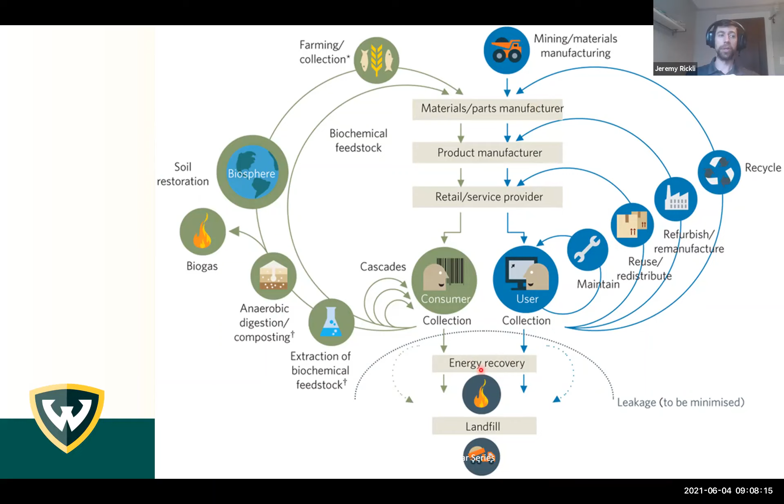And the circular economy really aims to advance those feedback loops. So how can we really avoid things going into energy recovery and landfill? And for me particularly, it's looking at discrete components - so not chemicals, not as much materials, but products that have multiple components that are assembled together, multiple materials, multiple functions, multiple lifetimes.

And how do you really go from this materials and manufacturing, and how do you plan in the design and in the use and in your operations to make these feedback cycles really operate efficiently? And there's different levels and there's different options that you can choose between remanufacturing, recycling, and reuse, and maintenance.

So maintenance will be sort of extending the lifetime of whatever item or assembly you have. Reuse, redistribute doesn't really put any more value, doesn't add any more value into a component or product. It basically brings it back into the cycle for another lifetime.

So, I think one example is plastic shopping bags. Sometimes you have people that collect a lot of them, then they reuse them to make bags - like larger bags to carry groceries in. So that's sort of a reuse side.

Refurbish, remanufacture really aims to add or to recoup some of the functional value of the product, to make it act like it is a new product, to give that same sort of quality, same sort of performance. So you are putting in some value, adding some reprocessing to the part in order to make it almost act like new. In the remanufacture, reuse kind of phase, in some areas and in some communities, it's called retaining the functional value.

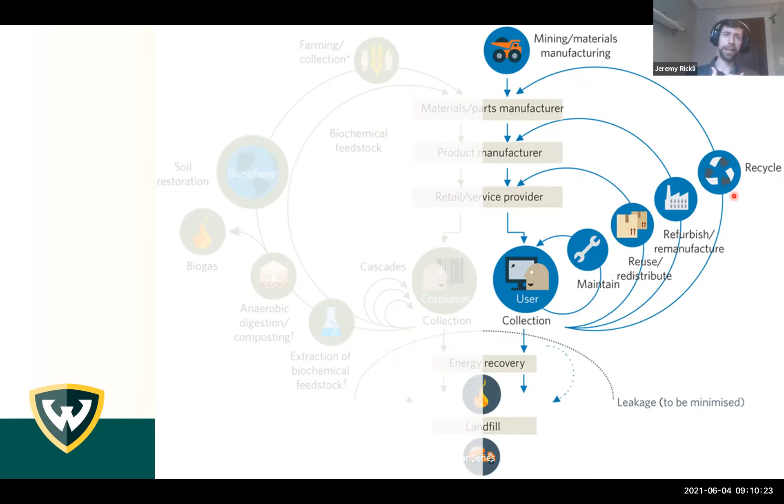Now recycling is usually classified as retaining or recouping that material value. You're kind of melting down, shredding the material, so eliminating the original function that component was for to get at that basic material.

Now, one thing that I kind of want to zoom in on here is these steps. So user, maintenance back to the user, reuse back to the retail/service provider, and refurbish, remanufacture back to the product manufacturer. Recycling goes back up to the materials manufacturer.

And where we focus on, and where this talk is going to focus on, is really the steps to make that happen - the steps that happen at these facilities. What does it take once you have it collected by a user, once a remanufacturer or core collection agency or recycler has it? What do they really do with it to access that value that exists in those parts?

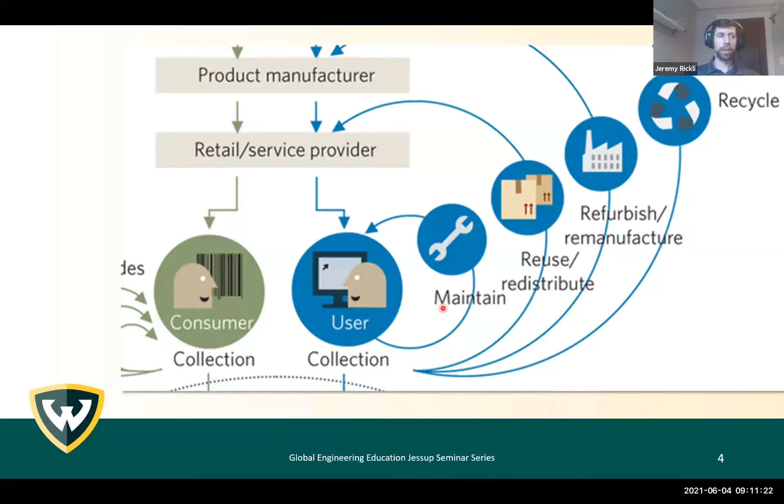How do they more efficiently get to that material value, get to that functional value in the specific components? This talk's going to focus on how we make these processes better that's happening in these entities.

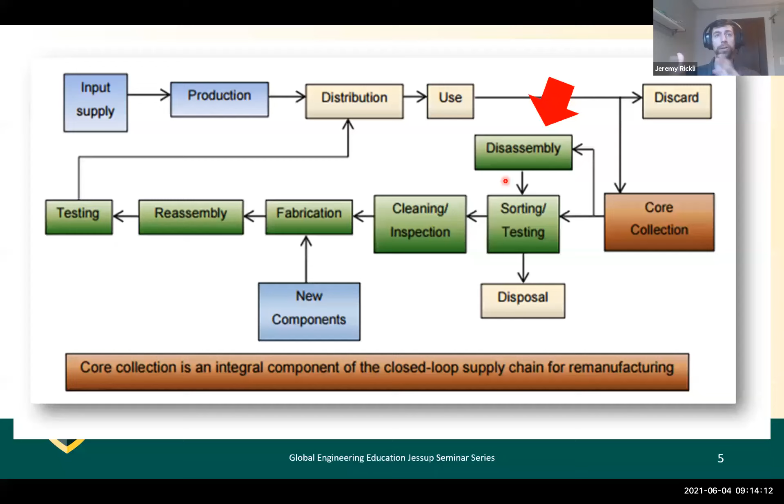So what is disassembly? Wei Song had mentioned kind of what disassembly is and how it fits into the system. I want to bring one definition that I'll keep consistent with the rest of this talk, and it varies a little depending on what literature you're reading. But here we're going to classify it as the process of physically separating a product into its parts or assemblies. That's what I'm going to focus on with disassembly.

Our research really tries to get at how we can make those methods better. How can we plan those methods better? How can we automate it? How can we design that into the system? But why do we want to do it?

So yes, it fits with the circular economy. Why is that good? Well, the first reason is reducing environmental impacts, reducing the burden on the environment. Keeping those materials in the loop, not sending them to landfill, trying to eliminate the environmental impacts that would happen if you just dispose of those components, potentially toxic materials, heavy metals, avoiding those going back into the landfill.

Now the second reason is cost. This is for some materials where you have trade-offs depending on what you're looking at. The cost of manufacturing some materials is very expensive, while the cost of remanufacturing those materials or components is significantly less. So if you can get to these components that you can remanufacture, the investment needed to remanufacture these parts is less than creating a new one.

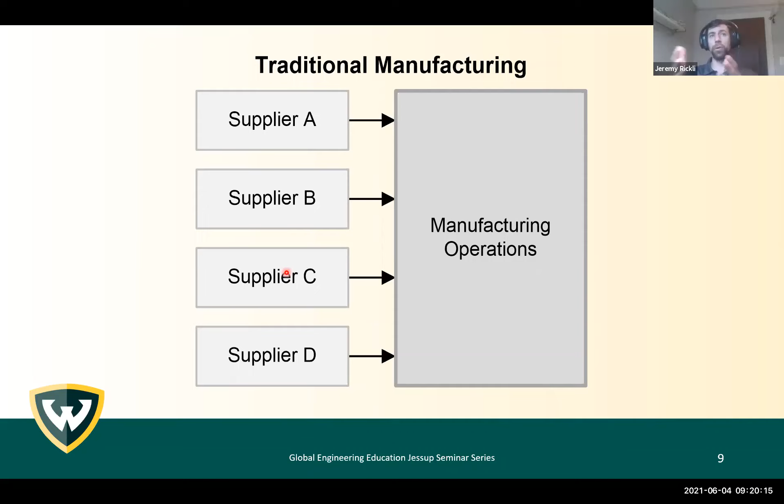So we don't have to require that companies deal with their products at end of life - they will want to anyway because there's an actual business case, along with an environmental case. If we go to traditional manufacturing, why we don't have that uncertainty is because manufacturers are able to release specs and have contracts with their suppliers that X amount of parts have to be delivered in Y quality standards. So you have these negotiations and contracts between your manufacturer and suppliers, and their performance is based on delivering materials at a certain quality, which can be controlled - so you're able to really know what's coming into your factory.

You could have a car that's at 100,000 miles, or you could have a car that's at 250,000 miles. And so they're trying to deal with all this to make some sort of business enterprise where they can reduce this unknown or uncertainty through disassembly, cleaning, inspection, and then have the processes to add value back to that part and send it back out.

So the goal we want to do in the lab is really research methods that take what we see now with value recovery and push it more into traditional manufacturing. Not push it towards traditional manufacturing, but really lessen these unknowns, make it more consistent so remanufacturers know what they're getting, or have a better way to deal with the uncertainty, so their operations downstream flow better or more efficiently.

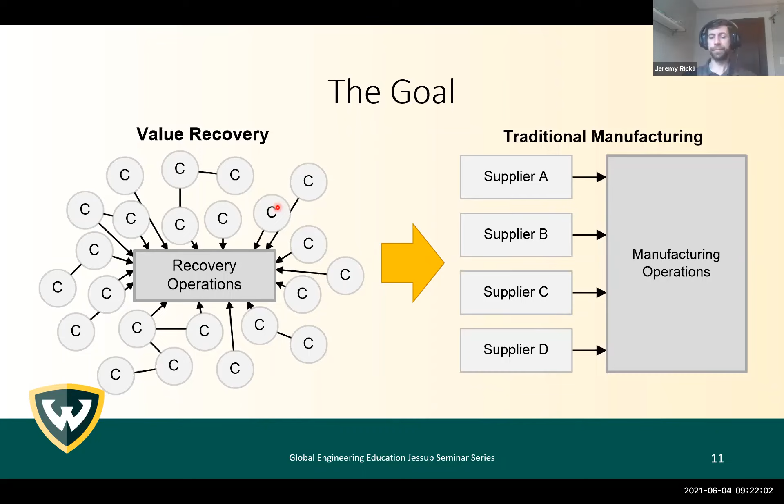How do we do that? This is where I'm going to focus for the next hour or so: three different ways. This talk is divided about disassembly, but into three different ways that we target it in the lab. One is planning, which is a mix between the stages of use, recovery, design - what do we do about planning for disassembly, whether at the design phase or whether I already have the design and have to remanufacture and disassemble a lot of these parts.

How do I plan for it then? Next is automation. So where does automation fit into disassembly? What are the challenges with it? Are there opportunities to really advance disassembly through some sort of automation?

And then lastly, we're going to get to design. As I go through, I'm going to try and tie all these together to show how planning can really impact your automation. Automation can affect how you want to design the part, and design could really help you out with planning and automation. So there's sort of all these different connections, and they feed back with one another. It's not just that design will feed down to automation, that'll feed down to planning - there really is a feedback here.

Now, we're looking at these, I would say right now, kind of separately. We have some planning work, some automation work, some design work. But one thing that really interests me is integrating these. So how do you get that feedback from automation? How do you incorporate that back into design, and how does design then come back to feed the automation side?

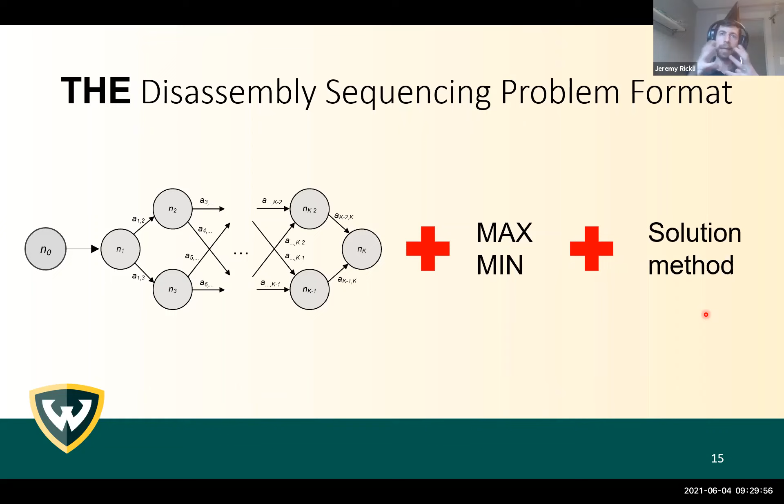So you have your representation, you have your objective function, then there's some sort of solution method for disassembly—an optimization algorithm, some sort of simulation, whatever it might be. This is how disassembly sequencing problems are set up, for anyone considering or doing research in this area. It really hinges on the incoming data for the disassembly. The objective functions and solution approach—especially the solution approach—can be pretty general; you can pull from different areas. The objective function you can change. But really, an essential piece of this is the data of how you represent disassembly.

I'm showing one version here, and I haven't seen any studies on what's the best version. I think it's personal preference, and sometimes it just depends on what part you're doing. But this is what we would term a directed disassembly network.

So here at node 1, this node would represent a fully disassembled or a fully assembled product, like your engine or a coffee maker, complete how you would use it. Each of the nodes represents some stage of disassembly—this would be stage 1, stage 2, maybe stage 3 or stage K as you get toward the very end.

Those stages are characterized by an assembly, the parts that are still remaining together, and then some part that you've taken off, represented by A. So A here would be an arc. I would take off this component of the product first, and that would take me from disassembly stage 1 to disassembly stage 2. This is a model that can get very complex and very large depending on the product you're doing.

But we're able to translate this directed disassembly network into basically a matrix representation—could be ones and zeros, could be something else. This information is really what we can input into our solution methods, and it allows us to determine whether we can disassemble it in that way.

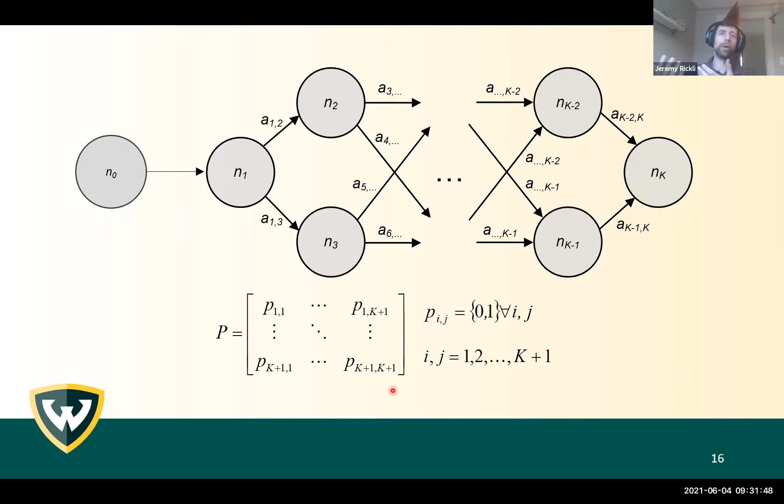If we can get that information, we can determine what the cost might be of disassembling in a certain way. It also gives us a way to check different disassembly sequences—is it feasible, can we actually achieve our disassembly goals with that sequence, and does that lead to a better objective function? So that's really one of the main values.

Now, the objective functions can vary. You have ones that minimize environmental impact, or some that really focus on cost. This can be a wide array of different variables or parameters within cost or profit—it could be maximize your profit.

In this case, we have like four different functions here, but really what I want to do is understand how my profit or revenue varies depending on my sequence. Can I determine a disassembly sequence that makes my profit or revenue more reliable per product or overall, so that I know I'm going to get maybe $5 or $2 on most every part I remanufacture? Or am I going to change my disassembly so that I might lose some money on some parts, but have the chance for overall larger revenue after I consider all the parts I disassemble?

And then the solution methodology—the one we've implemented is a genetic algorithm. There's a variety of versions of genetic algorithms, but in this case, the genetic algorithm will basically search through different sequences.

As it searches through those sequences, it will evaluate what the profit is, what the environmental impact is, what the variability in the profit is—whatever your objective function is. Then from those solutions, the way the genetic algorithm works is it generates new solutions, trying to slowly improve those existing solutions or sequences that you have.

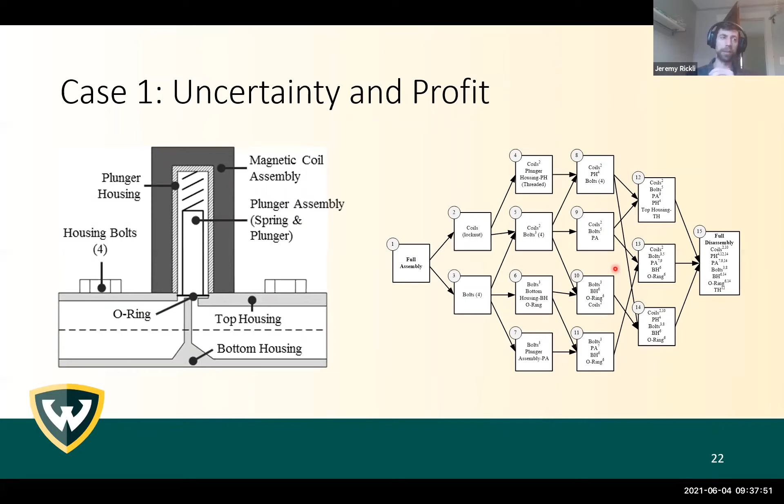First step, again, was converting it into our disassembly data, our basic network here. And then we said, what can we really do with that? How can I really investigate these impacts of what happens during the use phase in my optimization, in my decision making for my sequence planning?

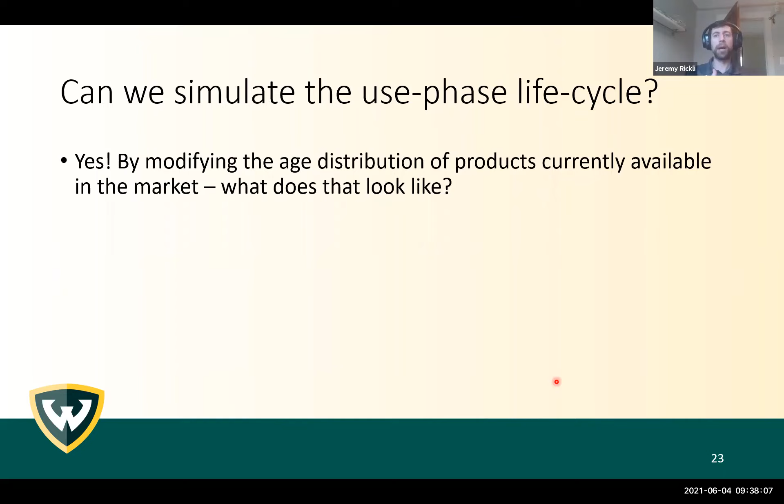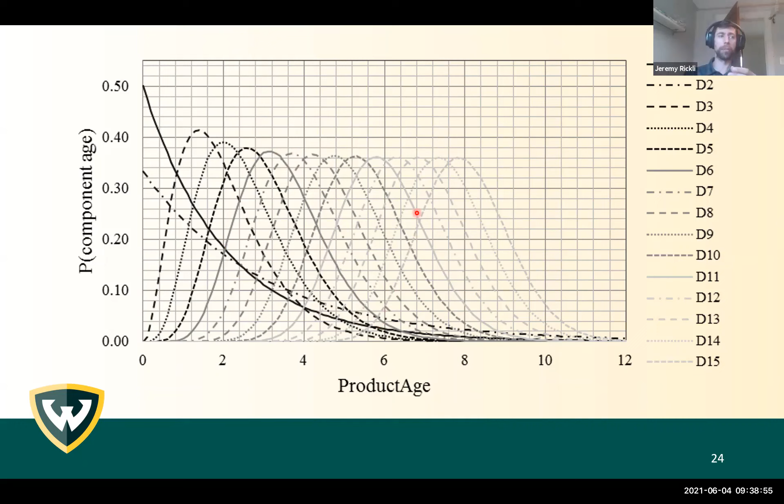Our company stopped producing it, so we're not releasing any new products out. Now most of the products that exist in use are around 3 years old, following some type of distribution. We can continually increase or change that distribution so we can get out to the point where this is now maybe a legacy part. We're not manufacturing it, we don't have the plans. Most of the products are fairly old, they're going to be fairly worn.

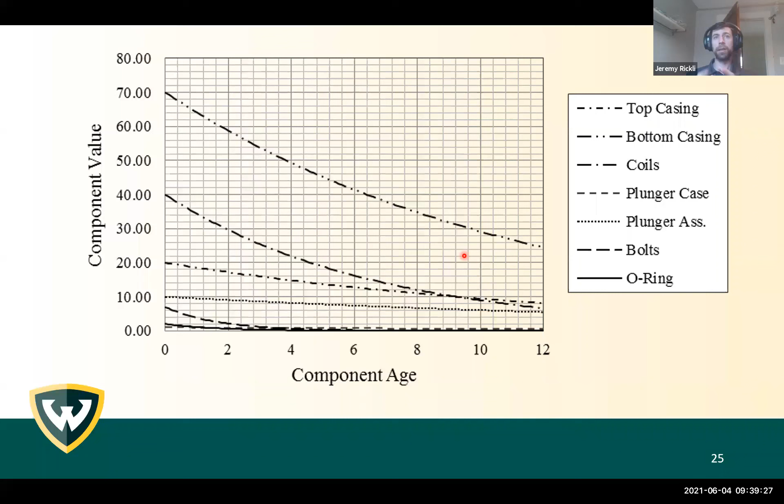Now, as that population ages, each component within that product is also going to change in value, and here we have these value curves as the component ages. You'll see this product here, the bottom casing that we call it for the solenoid valve, starts out as a very high value product, the metal piece that maybe has a lot of resale, recycling, remanufacturing value. Then it's decreasing around in years 8, 10, it's decreased by about half. So we take those two data points, and as we increase this distribution in our model, in our sequence optimization, our disassembly is going to change.

Our sequence is going to change, and our potential profit or our costs are also going to change. Because as the products are out here around age 8, we can see that the value profile of those products really changes for the manufacturers. Now, what can we get to it?

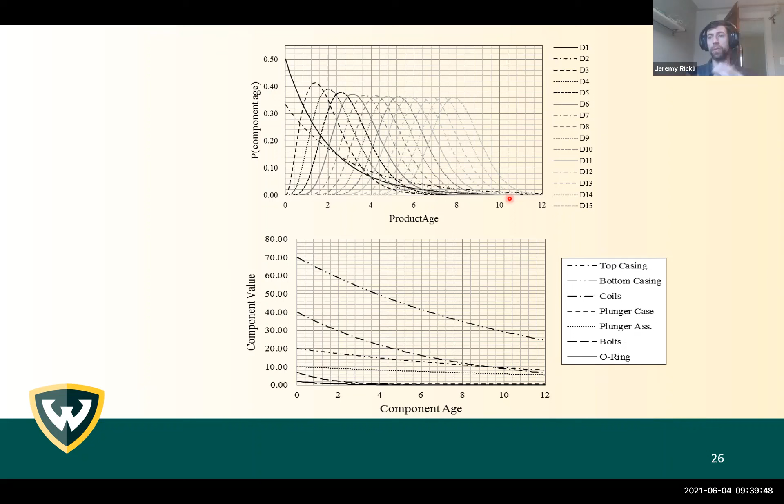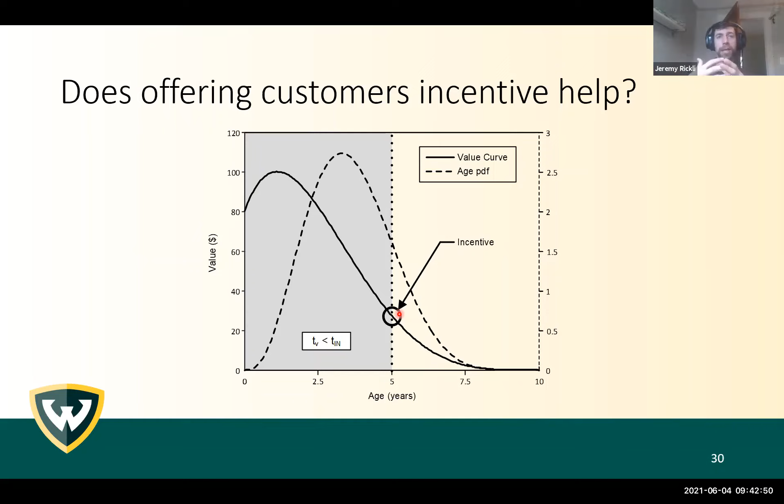Now that's one way to try and induce some control into the system so that variability, or the unknown between manufacturing and collection, is reduced a little bit. You can also add a little bit more depth into regional impacts - what's the intensity, what is the weather in a certain area, and how does that impact how my product might be disassembled?

So in this case, we haven't integrated this with the optimization method, but we've looked at how, if a product was used in a harsh weather climate versus a moderate weather climate, that intensity changes the value of those products at end of life. Then subsequently, if we can put that into the model, we can plan our disassembly accordingly, so we can tailor it for those parts we receive from certain countries or from certain customers who have high intensity use.

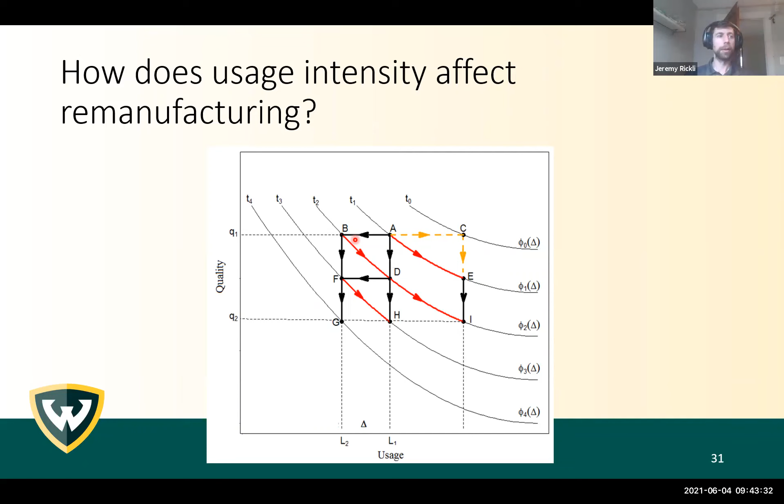Or potentially look at triage - meaning if I'm getting a large batch of cores back, what do I do with those? If it's going to really put a strain on my system, I may need to make some quick decisions on which products I collect I actually remanufacture, which ones I disassemble, and which ones maybe I scrap or recycle, because I don't want to store them for months, weeks, or potentially years, depending on how the business operates.

With that kind of core sequencing functionality, and there's quite a few of them out in research literature, you can do a lot with investigating different plans, different business models, different scenarios to help plan for disassembly a little bit better. A lot of that's given a product or given a case, so it doesn't really feed back into how do I actually change my product to account for some of these cases.

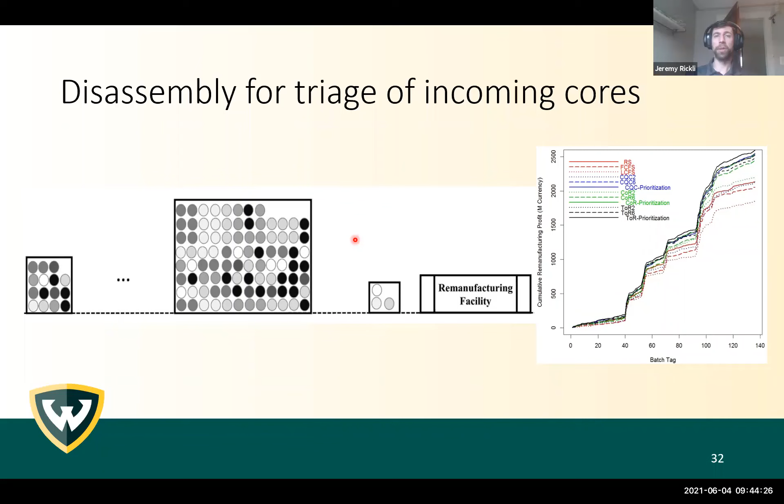So what's next? New objective functions. You can put in fastener designs, disassembly direction. One fascinating area is tracing product usage data. If you can get easy, efficient access to that data for the use phase, any remanufacturer is going to have a much better idea of what they need to do with that product at the end of life, and how much they can make off of it.

But no matter what you do with some of those objective functions, the disassembly planning is really still centered around this model that represents or characterizes how you disassemble it, what you can disassemble first, what you can disassemble next. That's a fundamental piece of data you need. The objective of what you want to study or how you want to modify that sequence to achieve a certain goal, and then the solution method, depending on what type of objectives you have. How quickly you want a solution, selecting that solution approach, is another important decision in disassembly planning.

So, kind of abrupt, but I want to shift over to automation, and I'm going to try and tie all these together at the end.

The automation side really comes in because of scale up, and critical materials becomes a very significant piece of this. If you can scale up the disassembly of critical materials, you can have a brand new supply base to feed into advanced technologies and take advantage of some economies of scale. Really, it's about efficiency. If disassembly can move over into some sort of automation, the amount they can disassemble and remanufacture starts to tip into the point where it's more profitable, where they have enough to sell that it'll be more of a business enterprise, and they won't have to deal with some of the uncertainties manually.

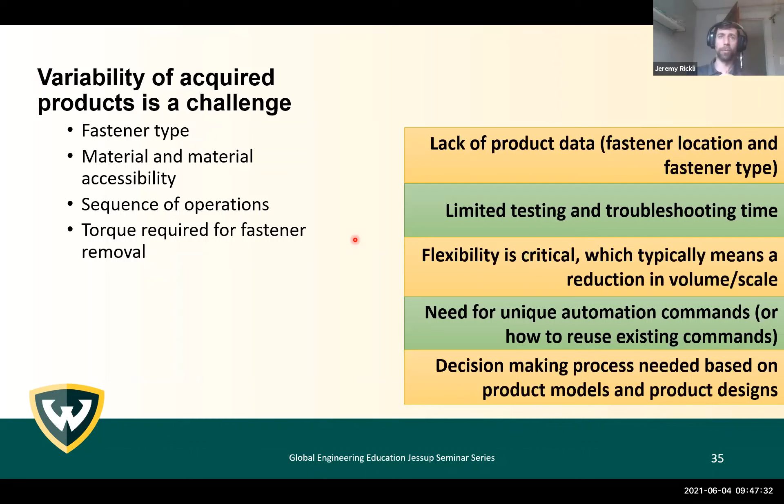Now, if you can address these challenges, especially for critical materials, you can get to a volume where the supply of those rare earth magnets really contributes to the total supply into new technologies and new materials manufacturing. But really, you need some new agile way to do this type of disassembly and to automate it.

So what we're looking at Wayne State, and this previously was a collaboration with Oak Ridge National Lab, is collaborative robots as an automation solution for disassembly. We're studying what type of performance gains, or what type of different performance, you can get out of leveraging collaborative robots in multiple facets on the disassembly side.

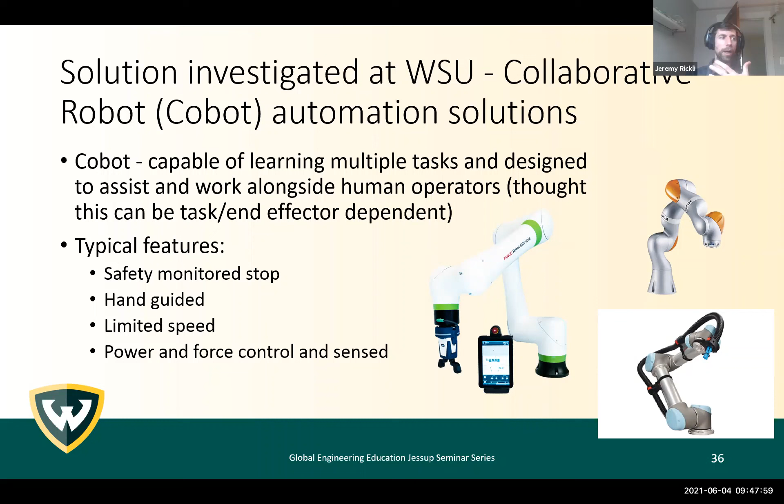So collaborative robots, if no one's familiar with them, they're typically lower volume, higher mix, so they have a bit of flexibility. They're a little cheaper than really large integrated robot systems, easier to deploy. Ideally, it adapts quickly to the environment, so an operator can reprogram it right on the fly through teaching it, kind of hand guiding this cobot to program it. They have lower speeds, lower payloads, so you have a trade-off there—they can't handle as much. They usually have safety mechanisms in place so you can remove the fences and an operator can work directly with them, as opposed to typical industrial automation or industrial robots, where you're going to have fences.

You have a significant amount of upfront programming into the system, and it's going to try and repeat this process over and over again. For disassembly, the characteristics of a large industrial automation system don't work because of all the different products you have to disassemble, the different fasteners, the different types of fasteners you see. So we need to move it down into maybe the collaborative robot side where things can change quickly.

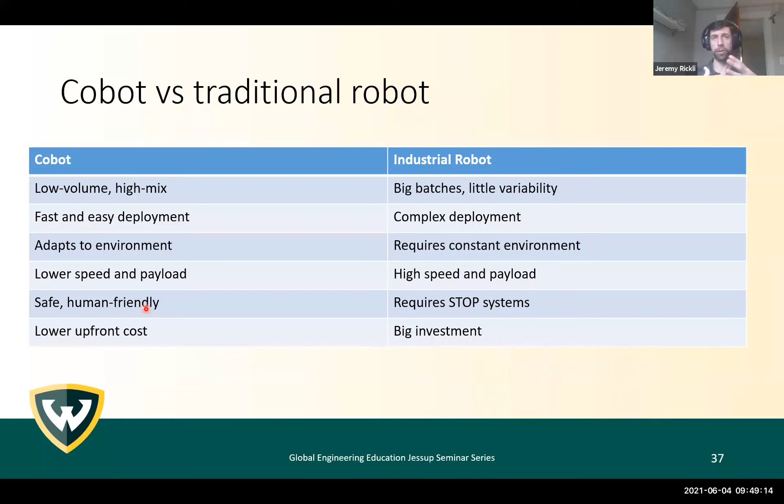Vision systems also play a part of that, recognizing what type of fasteners are coming, what type of parts are coming. It really is sort of a scaled approach that takes advantage of what the human can do now with manual disassembly, and tries to bring in the ability to scale up the volume of the collaborative robot.

Now it requires planning in this sort of coexistence between the disassembler, a human disassembler, and the collaborative automation. So what type of shared workspace do you have? Ensuring that you have collision detection safety features active, that your workspace is designed to potentially avoid collision, that your actions are coordinated, and there's a lot of research in this area outside of disassembly.

Human-robot interaction, human intent with a cobot—there's a lot more research there outside of what we're doing on the disassembly side. And then active learning: an operator actively changing the cobot, changing the program of what they have to do to take care of new parts that are coming in that need to be disassembled.

Some samples of how they're used in manufacturing: screwdriving at Bentley—so I'll remove the fence and now the operator can operate or work right with the cobot. A BMW assembly line where the human's right in there with the cobot. Masonry, doing wall construction, where the cobots are helping the mason lift the bricks and position them into place.

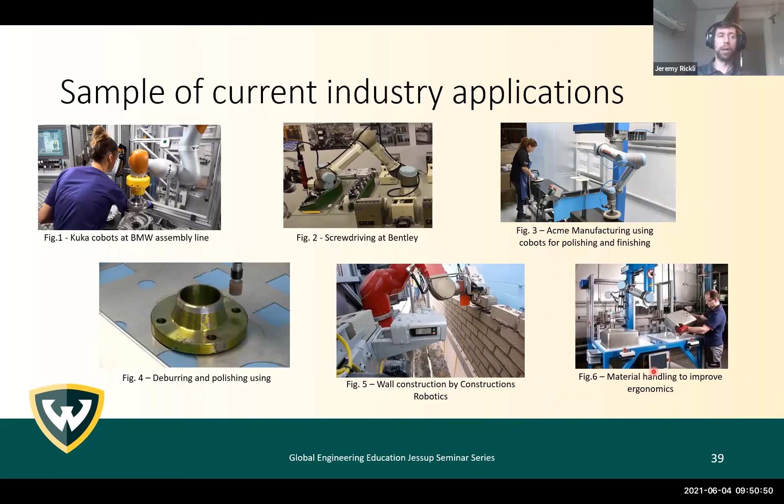And material handling is a large one, so assisting with pick and place operations, or doing pick and place while the operator is doing some action at the table. So there's a lot of possibilities here, and where we're looking and researching how cobots fit and what they can add to the disassembly side is really from two directions.

One is a task assistant—this is a cobot actively assisting with manual disassembly, doing this all day, every day. So we just have a lot of parts that we need to disassemble these materials. The cobot's going to assist to improve the efficiency and help with some of the guidance.

It could be pick and place while the operator can focus on certain parts. It could be that the cobot will handle some of the repeatable fasteners known, but the operator will jump in once you see a fastener or disassembly action that's really unknown, that hasn't been programmed for. And the other way is a teaching tool.

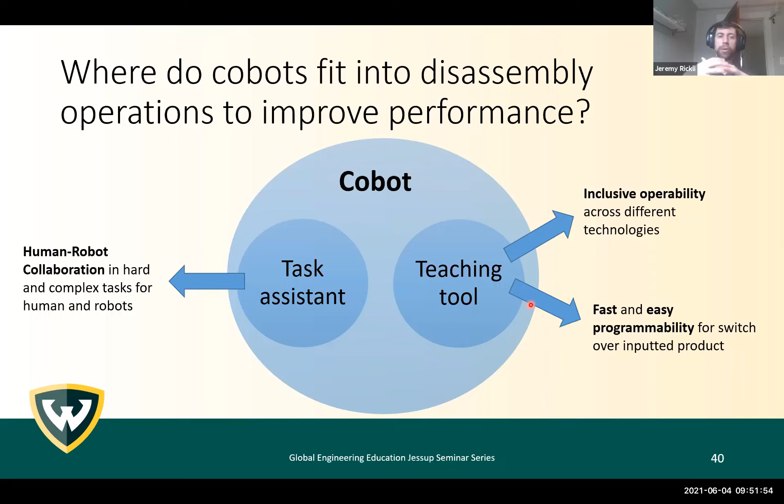This is to really reprogram—I'll say reprogram—but to allow your disassembly line to learn how to disassemble new parts faster. And that's the one we've started looking at, that we've made the most progress on. It's really the ability to quickly shift or reprogram your line to new products coming in, new parts coming in that need to be disassembled.

And then we at Wayne State, we're researching how we can take the cobot, the results of a cobot or a collaborative disassembly with a human, and feed that information back into this large scale line so we could immediately change parts. So if we had a product, an alternator coming in from a Toyota, it would have one disassembly action.

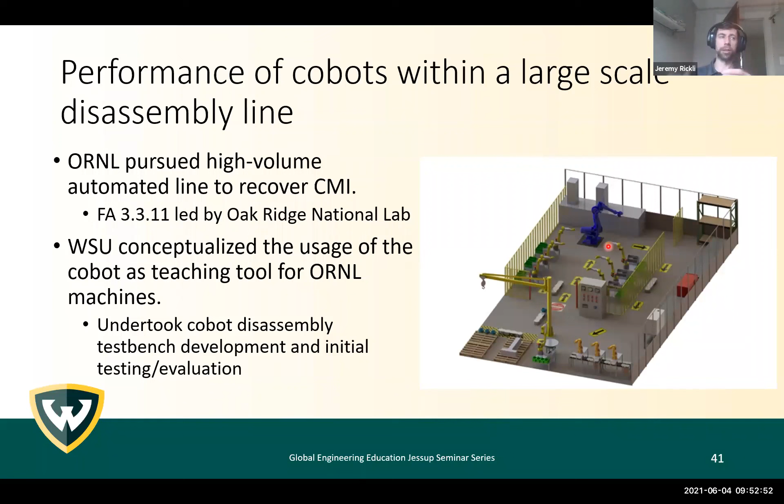If we had a Hyundai one coming in and it was slightly different, we could rapidly reprogram or characterize that disassembly sequence, that disassembly information, and send that to the line at the appropriate stations that need to do the actions for disassembly. Really what it was, was getting how do we fit this human in the loop between our large scale line and our cobot. That's the work we really focused on.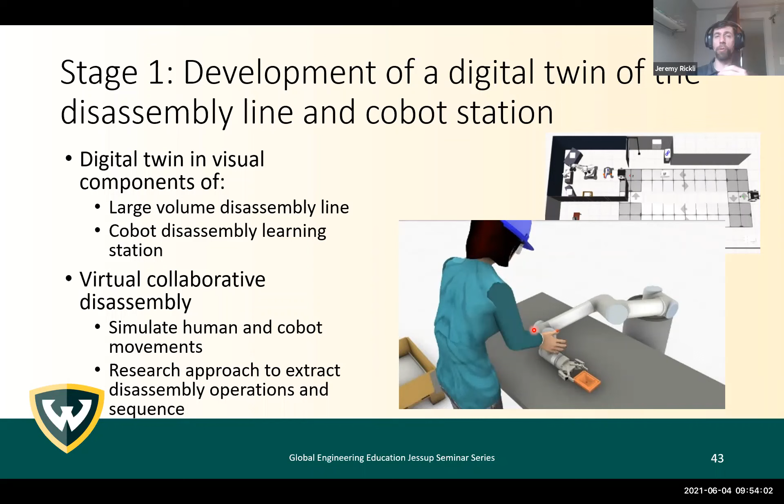We were developing and researching a method to transform the data collected from a user disassembling with a cobot into the information needed to send to the large scale disassembly line. That original directed disassembly network is one of the fundamental pieces needed for disassembly sequence planning. At the lower level, that's what we wanted to learn from this disassembly action with the cobot. We also wanted to account for disassembly direction to give specific directions to the robots in the large scale line.

So every new assembly or new model that would come in, an operator would work at a station with a collaborative robot. They would disassemble the part, and that information collected by the cobot would be sent to the central planning server for the disassembly line. That information would then get distributed out to the automated large scale disassembly line so that the correct robots were doing the correct actions in the correct way to disassemble this new part coming in.

Conceptually, we would first have this human to cobot interaction where we're doing the learning. That would be sent to the database where it would interface with the planning software. What is the schedule that you want to keep? What is the demand for certain parts? How much material do we want to produce? So that's going from cobot to the digital twin, to the simulated virtual line and virtual capabilities.

The decision-making processes in the digital twin would then relay the task information to the robots that had to do specific disassembly actions. So when that new component came in for disassembly, we could quickly program the line so that part went to robot 1 for this disassembly task, went to robot 2 for this disassembly task, and then eventually completed its disassembly operations in the large scale line.

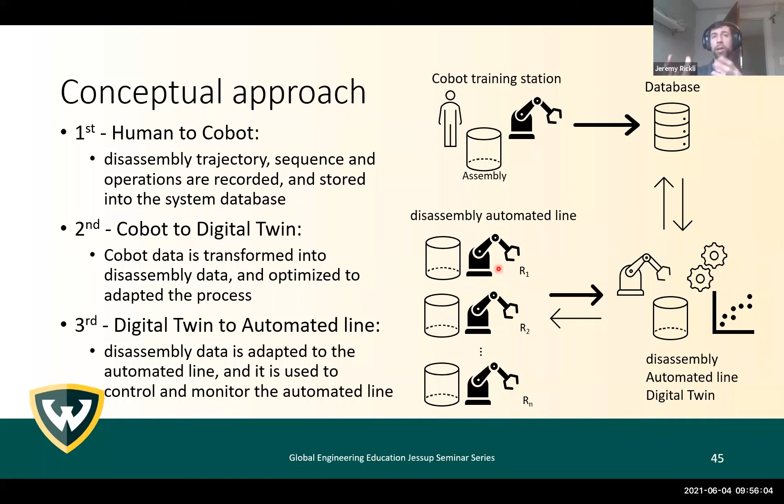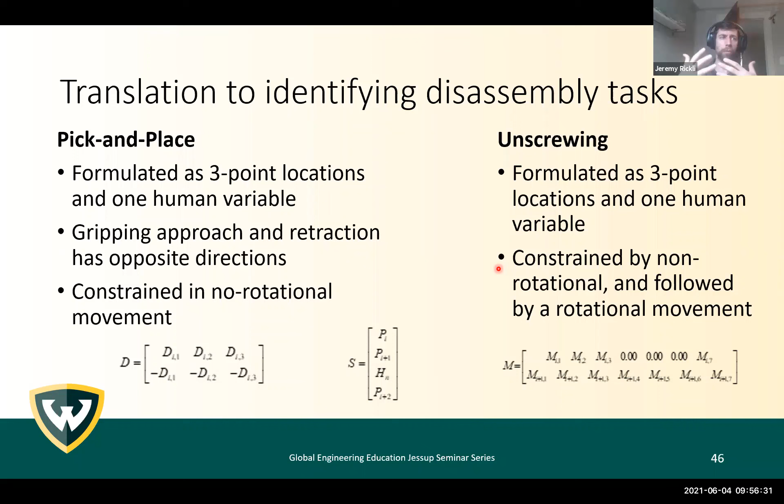Our main challenge was really translating that cobot data, the human data, into disassembly tasks. What is the disassembly task? I want to identify that it's unscrewing, or that it's just removing a pin. And then what are the actual directions for that task? So that's really where our methods focus: one was pick and place, and one was unscrewing, translating all that cobot information into those specific stages.

So we'd record the trajectory, exactly where the cobot is going, where the user is guiding that cobot. We'd have the speed, the rotation, and also signals from the operator. Once they disassembled the piece, the operator would basically put a check or a link in the cobot trajectory code, so we knew the operator was giving us feedback on changing or disassembling a new component, or disassembling it in this direction. Then we were able to take all that information and translate it into actual directions of disassembly.

Once we had the cobot, it was actually delivered last year around February or March. So we had no lab access. I was actually able to get it delivered to my house during some work with Wayne State. So in my basement, we were operating this cobot, or I was operating it, trying to get this code out so that we could continue our project with Oak Ridge National Lab.

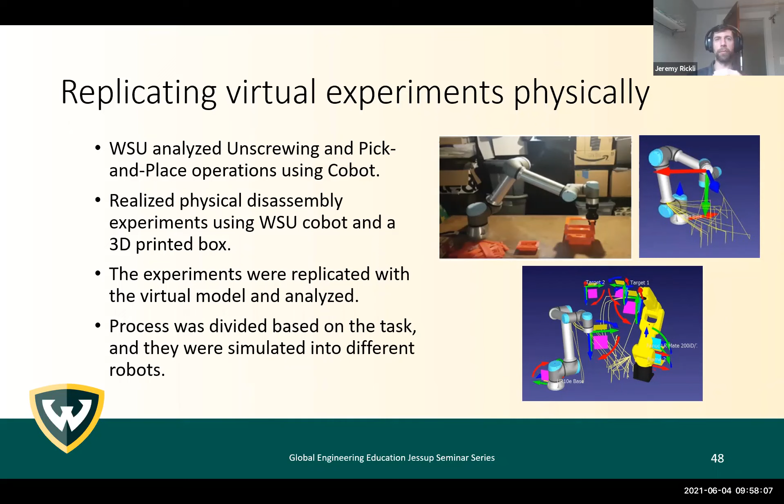So we have the cobot here collecting the data, and then it's fed back into our automation software, where we can extract the trajectories, extract the motions, and then from there determine what type of disassembly task was being taken.

As we progress on this, we were comparing what we had done, our method developed in the virtual side, with the actual human. We wanted to do this comparison because once you start putting an actual human into operating the cobot and guiding it, you're not going to always get the exact same position. So before implementing this into the line, we wanted to find out what uncertainties and variabilities a human operator would induce in this system, and how that might impact the disassembly information we wanted to capture.

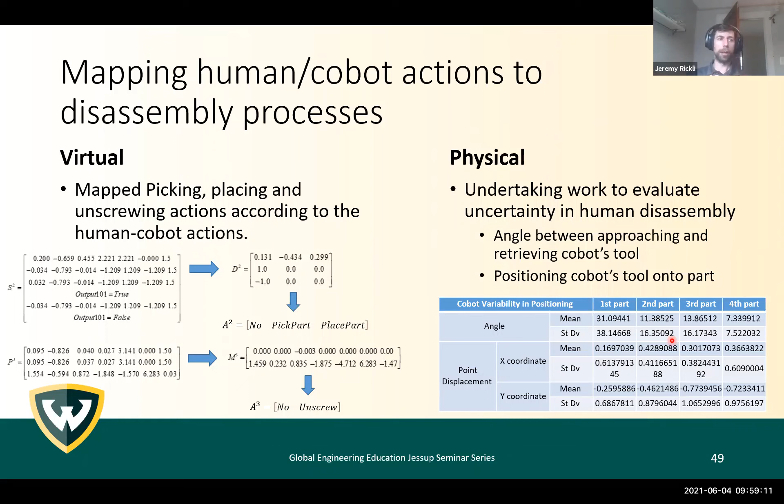We have a couple of matrices here. What these two tables are doing is comparing the virtual side, where it's perfect motion, exact, coming down exactly at 90 degrees to a part surface, versus what we collect from the actual cobot and the human doing it. What we learned is that we would have to research a method to account for some of the variability and small differences that a human would induce into the cobot and into the trajectory planning.

A human may have an angle for the cobot to remove a fastener, and that angle may not be perfectly 90 degrees, but the fastener would still come out and the cobot would still complete the operation. As we're working on this, our aim was to have a solution, because once it gets into the large scale robots, we want to avoid this type of angle difference. We want it to be 90 degrees from the surface, so you can more efficiently take that fastener out, and you won't have any errors when this gets sent to the large scale line doing this disassembly over and over again.

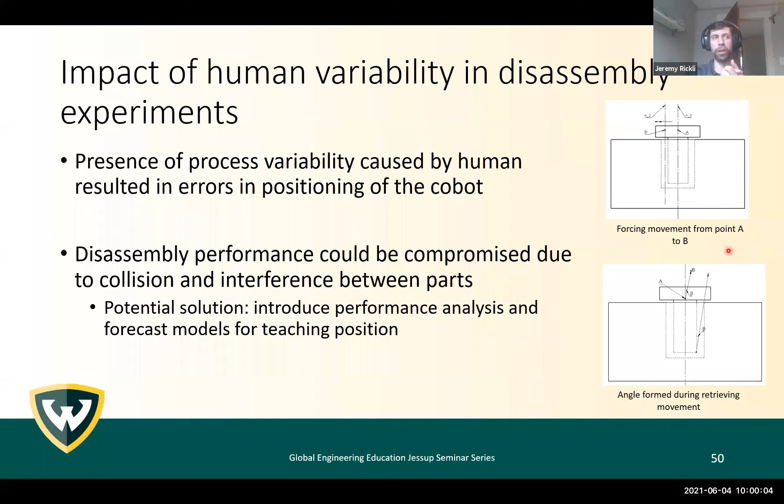So this is something we're still working on - how do we really account for this variability, and what's the impact on the disassembly side of it.

From here, we're moving a little bit into using the cobot as a task assistant rather than the planning for how to change or reprogram your disassembly line, and really trying to understand how a human is going to operate or work with a cobot to do disassembly, and what they're interpreting or seeing, or how they're behaving with the cobot, so we can try to optimize how the cobot supports disassembly.

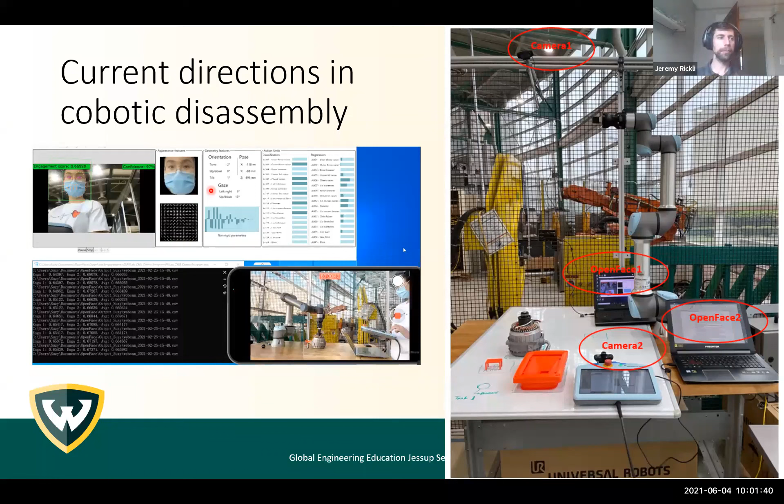In this system, we have two laptops, the robot, and we're collecting facial feature information along with all the trajectories and information from the cobot. These files get combined so we can determine how your engagement or interaction with the cobot impacted how you did your disassembly, or how you programmed it, in hopes that these cobots are something remanufacturers would find benefit in, and would help their disassembly operations, which is a place where they do want to improve.

And where do we see this going? This is from some conversations and meetings with MERA - the Motor Equipment Remanufacturers Association - located near Wayne State. It's an association of small to medium remanufacturers doing disassembly who may supply certain OEMs. There's a range - you may have very large remanufacturers with vast collection networks for cores and a variety of end customers, and smaller companies that deal with very specific parts.

One thing they're concerned with, or see as something that could be improved, is the disassembly side - not just improving the speed of disassembly, but also assisting the manual human operator doing disassembly with how to take it apart. So recommending fasteners, or doing recognition of what tools they need and what order they need to disassemble it.

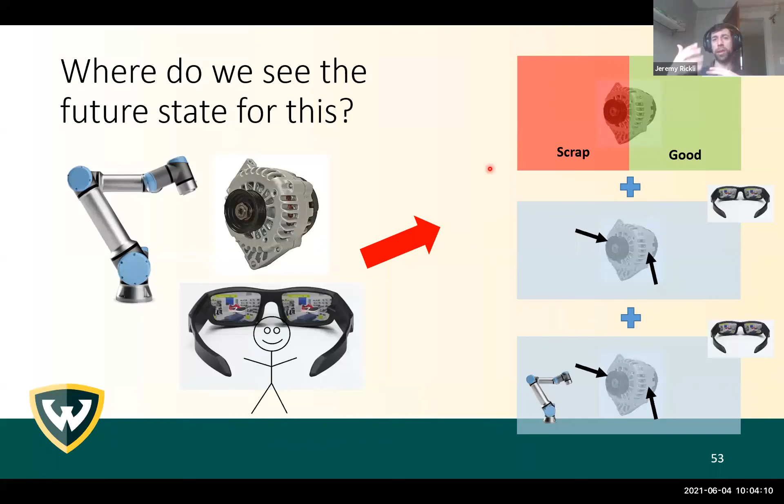This is where we're looking to in the future. We have AR here, and in order to identify if it's scrap or good, you have to have some sort of image recognition and analysis, with classification for the history of those parts, or feature recognition to identify scratches, gouges, and issues externally that you can see on the surface of the part, to help guide the decision that this needs to be sent directly to scrap. We want to avoid doing any subsequent processes on this component, because we're going to recycle or scrap it anyways.

So cobotic disassembly, I'm excited about it. Hopefully that came through. I think it's a very exciting area. There's a variety of researchers around the globe looking at this. They're studying different problems on safety, how you do task assignment, what is the human intent, how do you do it for specific parts? Does it apply to specific components or types of products? I think it's a very exciting area, one with a lot of potential to really help the disassembly and remanufacturing industry.

All right, I think I'm staying pretty good on time. I think we have about 20, 25 minutes left. I want to try and bring it all together with design for disassembly. So design for disassembly is something I've known fairly conceptually.

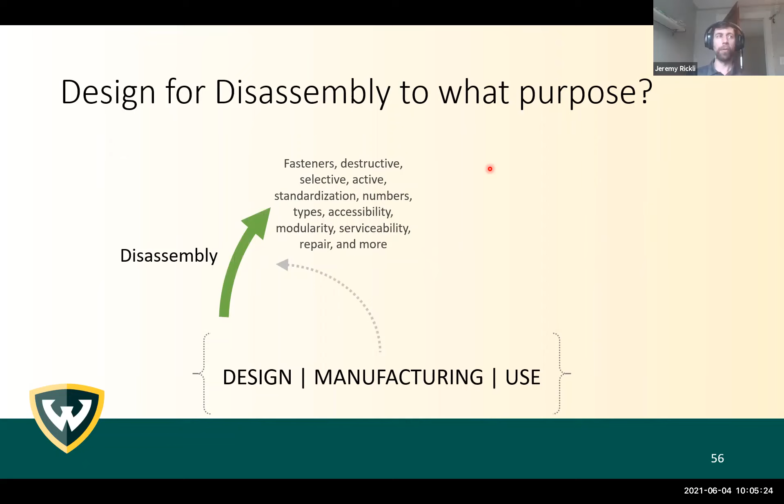I want to use similar materials, I want to use similar fasteners. But quantitatively, I've always felt that there is something missing. And what really I think is missing is how do we access a lot of what I already talked about in automation and sequence planning to help the design decision. So it's not just about rules on similar materials or similar fasteners, but we can really bring in a lot of what we learned from disassembly sequence planning and disassembly automation into the design side.

So if we look at design, why do we want to do it? One is disassembly, and this is really where I focus. Another one is for cleaning — how can I best clean it after disassembly? That's the next step. If you have product designs and materials that really support the cleaning side, it's going to make that easier on the remanufacturers.

Reprocessing — this gets more into design of specific components, not designing of your sequencing or how you're going to take it apart. It's adding some material to one component so that it can be remanufactured a little bit later. You know, rotors on a car, you can usually turn them down — that's a type of repair, remanufacturing, extending the use. So if you build that in at the beginning, then potentially there's a very targeted remanufacturing piece that these companies can do at the very end.

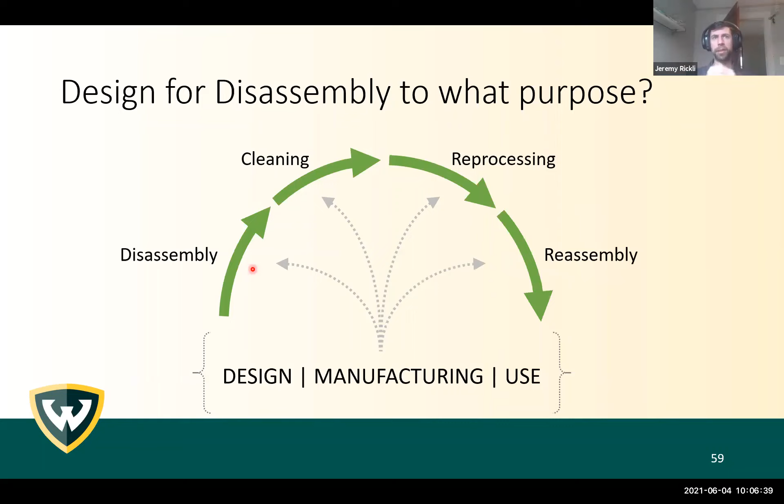And then reassembly — is it built for reassembly, or once I disassemble it, is it going to be done, where I'm not going to be able to reassemble it? So where we're doing work is really on the disassembly side, how you take it apart, and hopefully that makes sense with what we've talked about in the first two sections here.

A lot of it is, how do I take advantage of my optimization? How do I take advantage of what I've learned from cobot disassembly, and bring it back into CAD? Once I have my design, my assembly design, I want to be able to do the disassembly optimization methods. I want to be able to simulate what a cobotic disassembly might be, and do all that in the design.

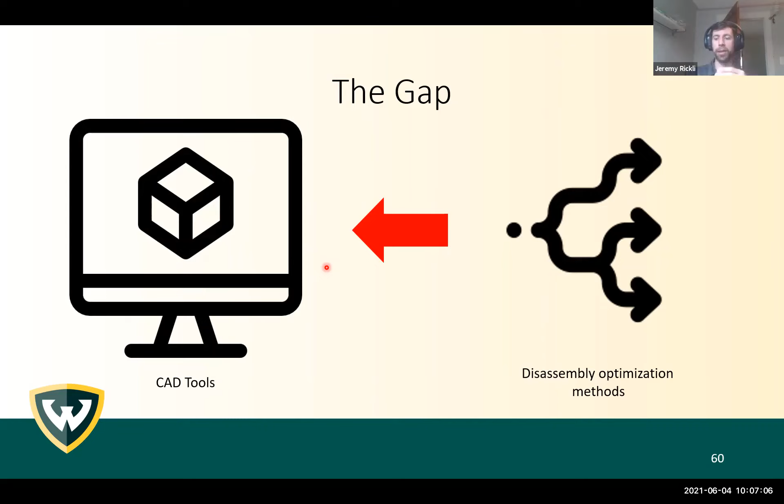One of the issues we've seen so far, the best that we know of, is that one real significant piece of information is missing, and that's your disassembly precedence matrix. All the way back at the beginning of the sequence planning method I talked about probably about 40 minutes ago, right — this is the essential information for any of the optimization. If you have this, you have a pathway to doing a lot of analysis on disassembly. And what we've seen is that this is missing right now, or it's not easily retrievable from the CAD environments. You may have to do it manually. Well, if you have a very large assembly, that's very time intensive.

Our work on the design side has been pushed to: how do I retrieve that information? What methods can we develop, what methods can we research, so that from the CAD side I can get the disassembly information I need to plug into my optimization methods and sequence planning methods? Everything I can do in sequence planning, and there's a lot of research and methods out there, I can bring back into design and access those.

To do that, we need to think about the reverse of how we're doing CAD. We need a way to evaluate what are my contact constraints in my parts, what parts are touching each other that prevent me from disassembling them, and what are my non-contact interferences that prevent disassembling a piece. If I have a housing with a component inside, I can't disassemble that component because it's eventually going to hit the housing piece.

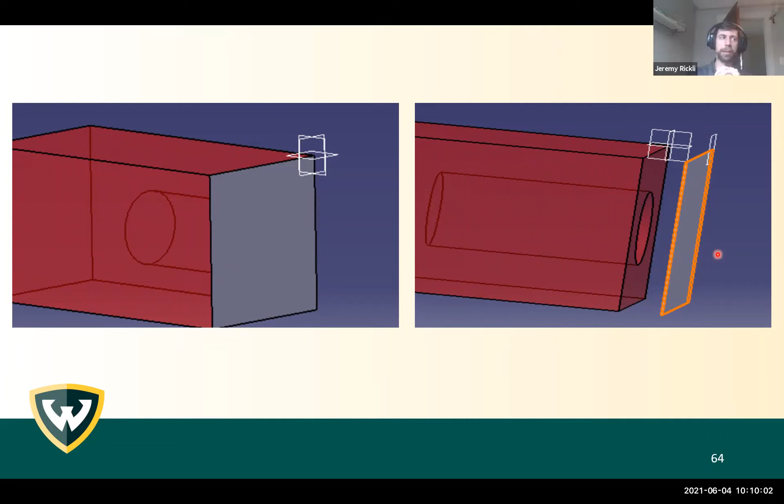In this case, I have a face here, one face of this rectangular component. I want to see, moving out in the direction of this face, perpendicular to it, am I going to collide with anything? Am I touching anything right now? If this is built into your assembly file when doing the assembly, we might be able to get at that pretty easily, but we haven't seen that it's really built in, so we're having to go in and retrieve that information with methods we develop on our own.

Here's a case for contact and non-contact, a pretty trivial, simple case. This block and this plate are in contact here, so we need to identify that for our disassembly, to eventually make that precedence matrix to characterize disassembly, and know in which ways it can move away from that plate. If we assume this plate is stationary and can't move, then based on this contact relationship, this block can move up.

In this case, I have a square with a square hole in it, a piece missing, and a block. Here I could move this block up and down and I'm not going to have any non-contact constraint. But if this piece is a housing, like a slice of part of a housing, and this block is sitting inside of that, then I'm not going to be able to disassemble this block because I'm eventually going to hit this piece.

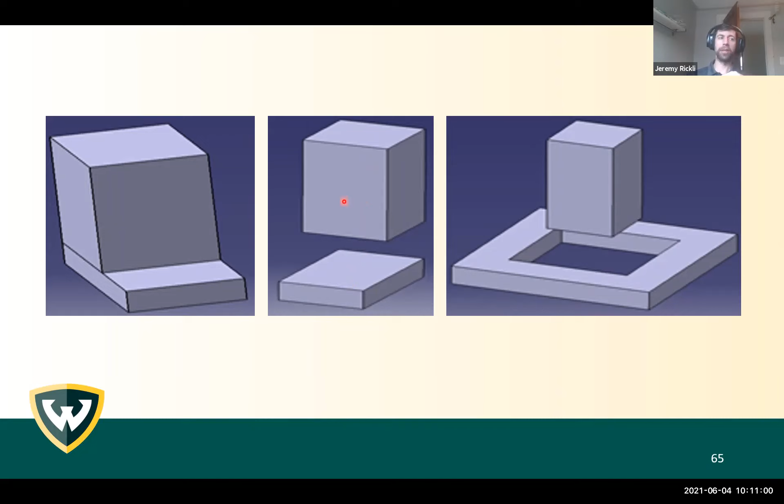How we've started is we look at a single stage first. This is sort of how we approach this problem. If we were given this test assembly, at this stage I want to know what things I can disassemble and in what direction. To do that, we search through all these different interferences or relationships between the parts and obtain what's called an interference matrix, with our list of parts in the rows and directions in the columns, which gives us a sense of which way these parts can move or can't move. That's the first step.

And that leads to a disassembly precedency criterion table. After looking at those different movement capabilities, we're trying to find out which ones have the most flexibility, or can move or be disassembled the most, which one has the most accessibility. That might be the first one we really need to disassemble.

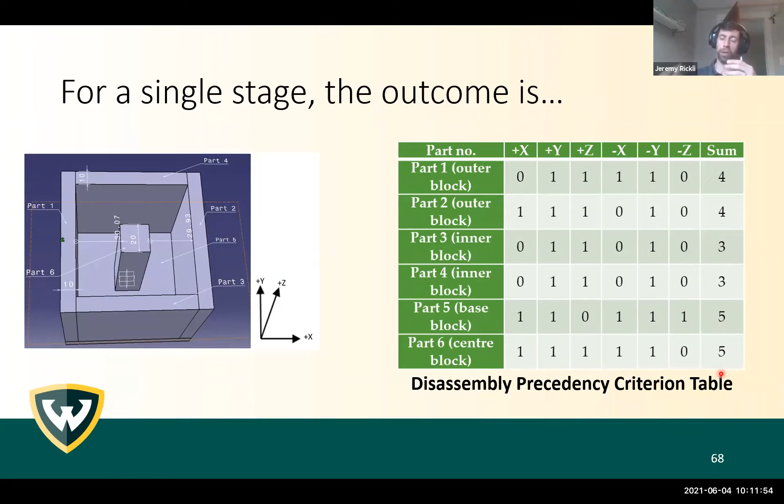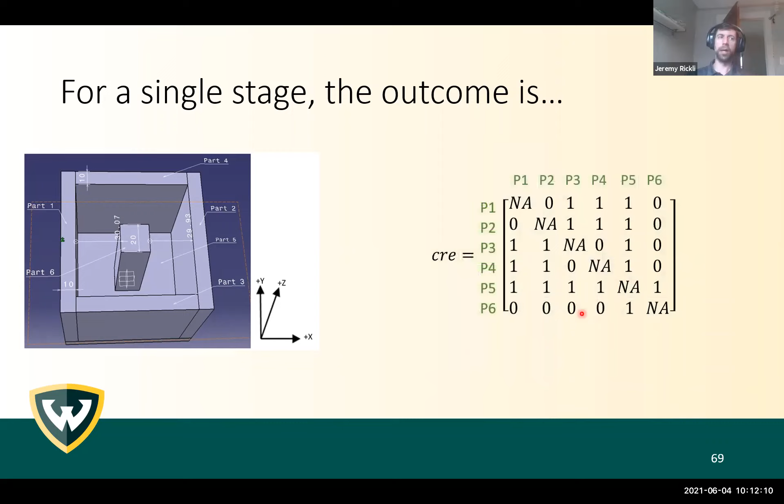So our interference matrix gets transformed to this criterion table, and that eventually gets transformed into what we showed in the very first section, the precedence diagram or precedence matrix that shows which parts can be disassembled or cannot be disassembled. From there, we can infer which one is best or which one can most easily be disassembled.

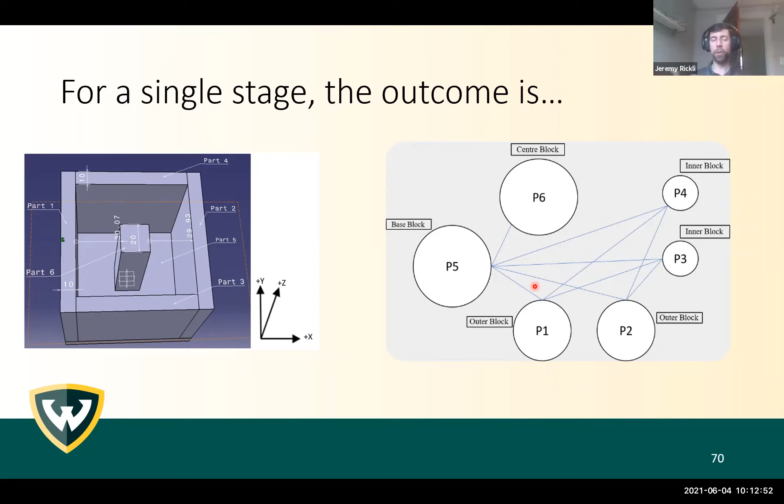So at this stage, you can make a decision: I'm going to disassemble part 6. And once you do that, you need to do it again for the next stage, because once I remove a piece, I have almost a new assembly. I might have new relationships come up, or relationships that no longer exist. So now I need to iterate and redo my process again.

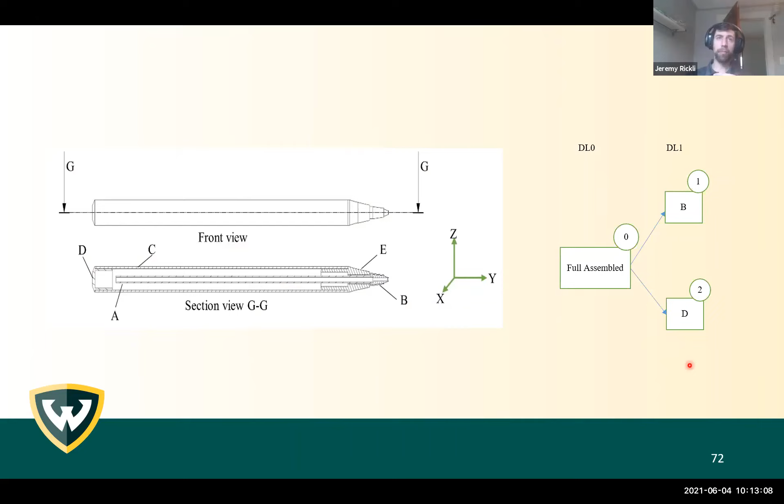So what we find is if you repeat that—and this is for a ballpoint pen—if I do it at the very first stage, I obtain this type of directed network. As I disassemble parts and repeat this, I start to build my directed disassembly network. In stage 2, I find 2 pieces I can disassemble. Stage 3, 3 parts to disassemble, all my different options, my nodes for disassembly. Stage 4, all my different nodes. And stage 5, fully disassembled.

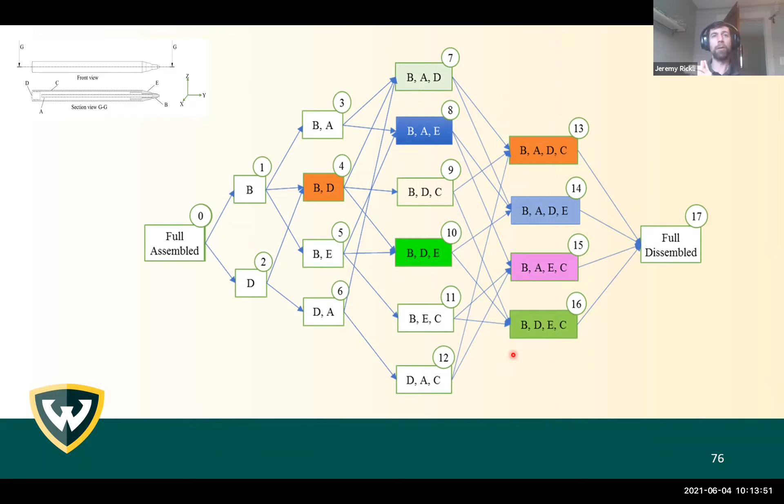So now by repeating this sort of collision into our disassembly sequence planning methods, we can potentially put it into some of our cobotic programming methods to see how my disassembly sequence is going to perform, to find the optimal disassembly sequence, or to change our design to see how my disassembly sequence can be improved.

So with that connection, we feel you have access to a very powerful tool, and it's not just the sequence planning program I showed. Literature is rife with disassembly optimization methods for planning your disassembly line—which station should get which tasks, planning gripper changes for disassembly for a robot, planning direction of disassembly. With this information, nearly all of those methods really become accessible at the design side.

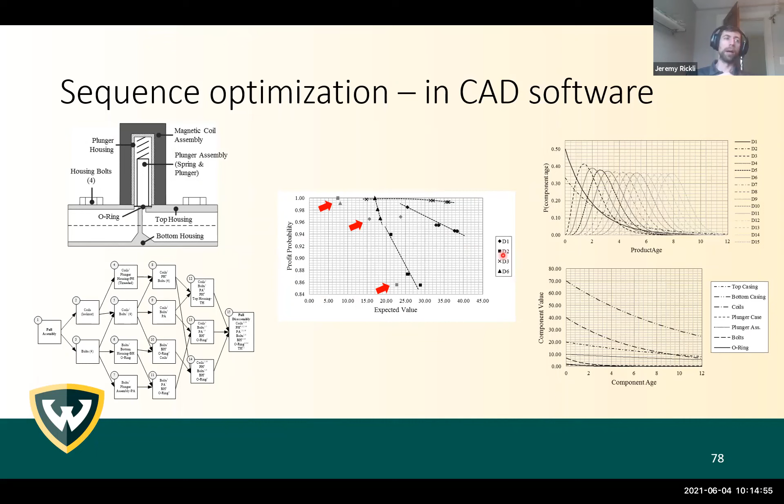So for us, sequence optimization is one area we want to integrate now. We want to be able to put in our solenoid valve design, change our design, and then demonstrate how changes in our design can really make our trade-offs better—how it can really improve the disassembly we're going to have at the end of life.

We want to simulate what the cobotic disassembly is going to be like. If I can get that precedence matrix, I can start planning how I really need to do the automated disassembly. Once you have that—yes, it can be disassembled, no, it can't be disassembled—it's not a far jump to evaluating in which direction it should or has to be disassembled. And once you get the direction of the disassembly, you're able to translate that into trajectory planning for cobots. So now at the very beginning of the design stage, hopefully I can start planning my automation processes for how I really want to disassemble this.

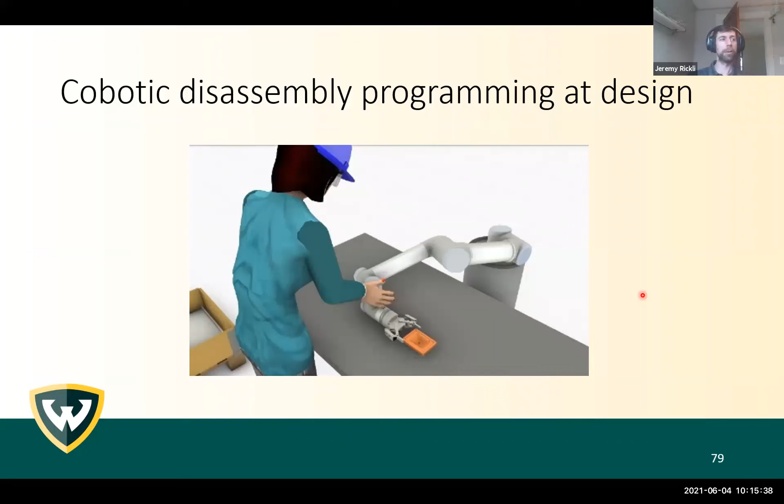And another area we've done some preliminary work on is starting to ask: we can do the optimization methods, we can do the programming, we feel there's a direct connection there, but really we're still missing the piece of what happens to this component during the use phase. And what happens to that component or product during the use phase does change how it can be disassembled.

In that case, we can start to simulate different wear patterns in an assembly to see how our disassembly really is going to change, or if our disassembly opportunities or planning really needs to change at the end of when it's at remanufacture.

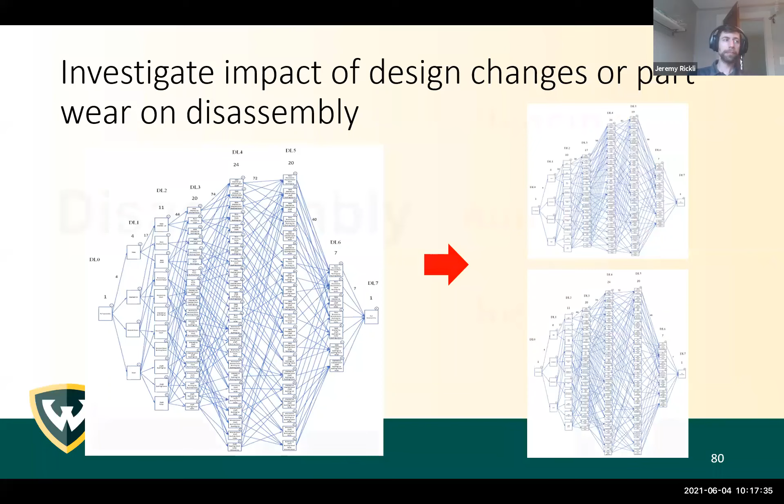So that completes the design side. This is actually my summary now. I was trying to be succinct here, but I wanted to take you through the disassembly research we're doing in the Mars lab—not the planet—on manufacturing and remanufacturing, and really on disassembly.

On the planning side, it really boils down to having a model for your disassembly, an objective function, and then some solution approach. It's a pretty standard problem formulation—you'll see it all over the place in disassembly research.

On the automation side, we want to take advantage of scaling up the disassembly process so that we can access more material. In the case of critical materials, we can get more of them out from used products back into the forward manufacturing side. For other remanufacturers, this means their processes can operate a bit more efficiently.

The design side is where really everything comes together. It's been more of a concept for me, but our hope is that with some of the work we're doing it becomes less of a concept, and we're able to directly bring in the automation and planning aspects, the optimization, into design—so that changes on the design side make planning more efficient, and automation a little easier or known in advance.